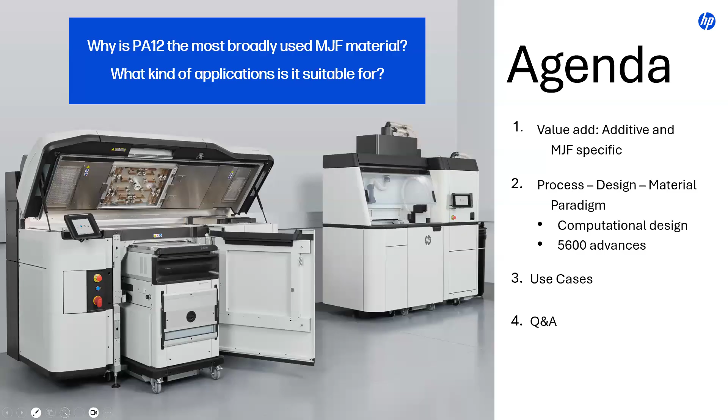So in comparison to traditional manufacturing methods on the left here, additive in general offers a lot of opportunities for customization, the ability to create new and complex designs, iterate really quickly, and use complex geometries, as well as giving a lot of production flexibility, right? You could be printing one part or 1,000 parts, and then you get a lot of cost and lead time savings often with an additive or an MJF process.

But then in the field of additive, if those are the type of advantages you're looking for, that customization, complex geometry, and high mix, where does MJF stand out in terms of additive? That would be in the isotropic part strength, so the ability to create really robust parts that are strong in all directions, the design freedom that it offers, as well as the ability to scale.

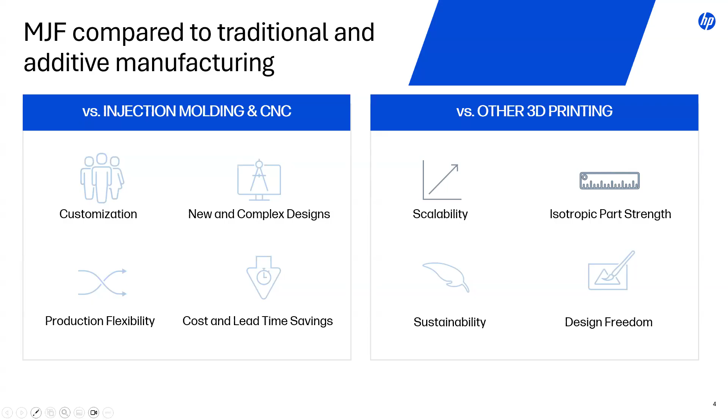And so when we look at PA12, this is kind of, like I said, the workhorse material for MJF. And why is that? So first we look at the physical properties of PA12. On the left here, we have the mechanical properties of PA12 on our 5600 series. You can see the strength and modulus are quite high, as well as a really good elongation.

For this material we have fairly good impact strength as well. We are not quite at injection molding properties, but we do approach the properties of injection molding. So you're able to produce really strong parts.

And you have all these additional benefits that come with PA12 on MJF. PA12 is very recyclable. We're generally using an 80-20 refresh rate, meaning 80% used material each time. That brings costs down, brings carbon footprint down, as well as having that high isotropy and dimensional control, repeatability of the parts. It's just very fast to print.

So all of these things come together and make PA12 our kind of catch-all material. If you're evaluating an application for additive, because you want things like complex geometry, high mix, or production flexibility, you would basically start with PA12. And if these properties are sufficient, that's where you would land, because it is a very balanced material. It balances the ability to print quickly and at low cost, with high repeatability, dimensional control, and high mechanical properties.

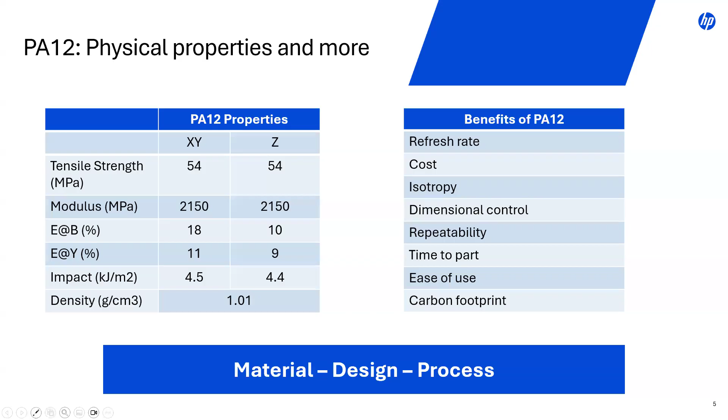One of the things I'm going to talk about today is computational design. This is a kind of design progression that we show. This is actually a part originally from an HP latex printer, so 2D printing - a machined aluminum part. If you talk about CNC machining, the thing that reduces cost is reducing the number of machining operations. That's going to allow you to have a high throughput of parts.

But then if you think about this 355-gram part, converting that to just the parts of it that you really need for plastic, that already has a cost reduction and a weight reduction. And then you can go further with complex geometry, like adding this internal truss or lattice structure.

This is the final iteration, where you use computational tools like topology optimization. Here you give a computer all of your design constraints, the loads something's going to bear, and it's going to generate, based on those load paths and constraints, a part that has the minimum amount of material required to fulfill those expectations.

And so this part, all the way through the design progression, represents a 50% cost reduction, 93% weight reduction, and 95 times lower carbon footprint than the original part. And it still fulfills those same

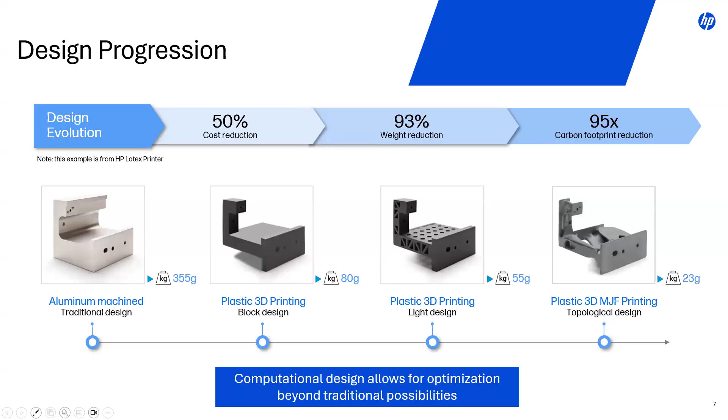I have another example of that here using computational design. This is the back post of an ankle foot orthotic medical device. You can see that computational tools were used here to model the stresses and basically create a more optimized design that's better for the patient, better optimized for that final application, and uses complex geometry.

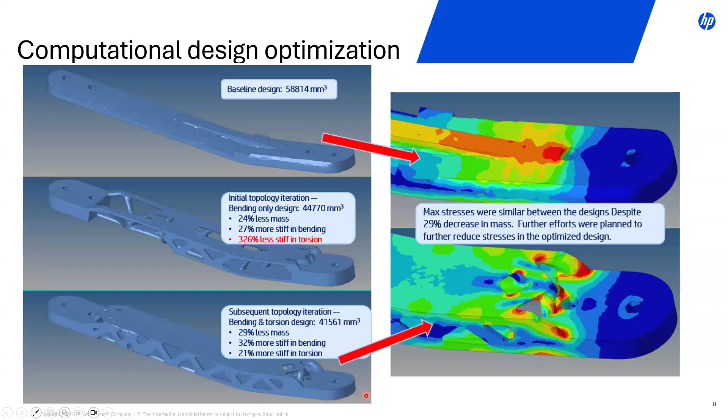to have a part that has less mass overall, but is still more stiff in bending and torsion, by taking advantage of those three dimensions. And then the MJF process and the strength of our materials is able to bridge that gap between creating the computational design, creating the CAD model for it, and bringing it into the real world in a way that is strong, reliable, and scalable to fully take advantage of complex geometries.

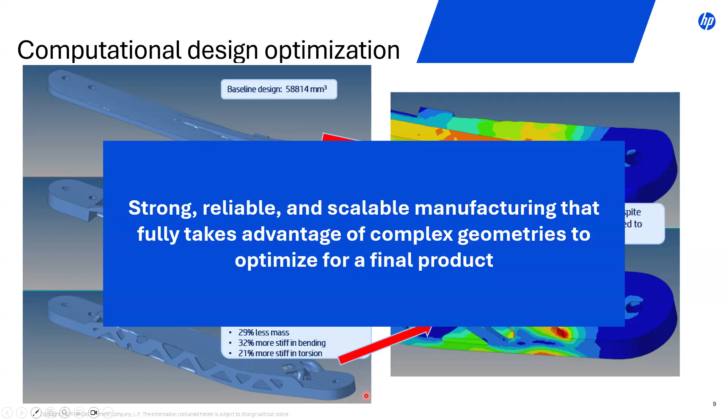So we can look also at PA12 across different industries. MJF is very prevalent in a number of these different industries, from automotive - a lot of interior automotive components - to drones. I'll focus there a little bit because I work a lot in the drone space. Robotics in terms of end-of-arm tools, and even humanoid robotics, or people have probably seen a lot of those robotic dogs.

Industrial applications, so we're talking about manufacturing and processing lines, as well as O&P and medical devices, or the medical space. Each of these takes advantage of different aspects of the MJF process and of PA12 itself.

For example, in automotive, it's very necessary to have Class A finishes, and this really takes advantage of all of the different post-processing that can be done, and a lot of the exploration that's been done on MJF PA12. In the drone space, we're very concerned with lightweighting. That lets you go further on the same battery life or carry higher payloads. Yeah, so some of these will take more advantage of certain aspects of PA12.

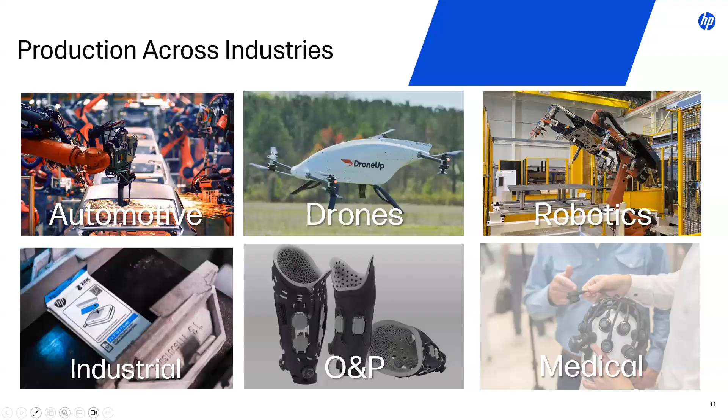So this is the Bushranger drone from the Eye Above project. This drone has over a 2-meter wingspan and is fully 3D printed. The entire body, the wings, the frame, tail is all printed with MJF.

It's very interesting talking to their CEO. They're creating this drone for wildlife conservation. It's an anti-poaching drone in South Africa, and it has very specific requirements because of that. It has to survive harsh environment, be field serviceable, really durable, and have all those segmented pieces fit together precisely. And of course, be very lightweight so it can travel long distances and stay in the air for a long time.

Robert Miller, the CEO of the Eye Above project, Telluraves, talked about how they had looked at existing drone solutions and nothing really held up to that environment. So they decided to create their own. They tried a lot of different types of technologies, and this was what they found to be the only thing that let them put this drone together and have it work in that environment.

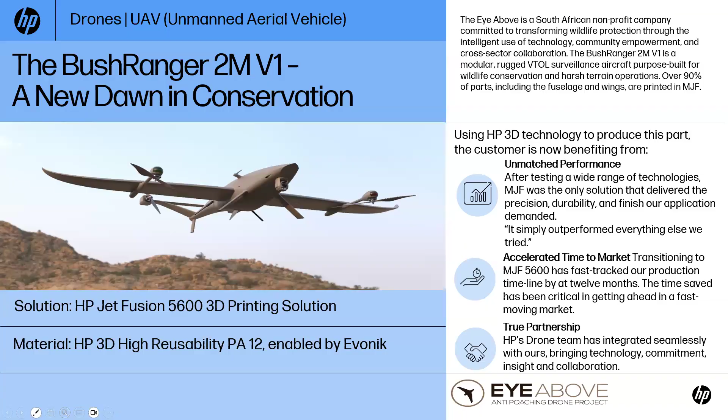So PA12, literally as part of the MJF process, you pull parts out of the build and we do a media blast. That's kind of almost like the sandblasting this is going to get in sub-Saharan Africa. We have to have the repeatability and consistency of these parts in order to fit those segments together.

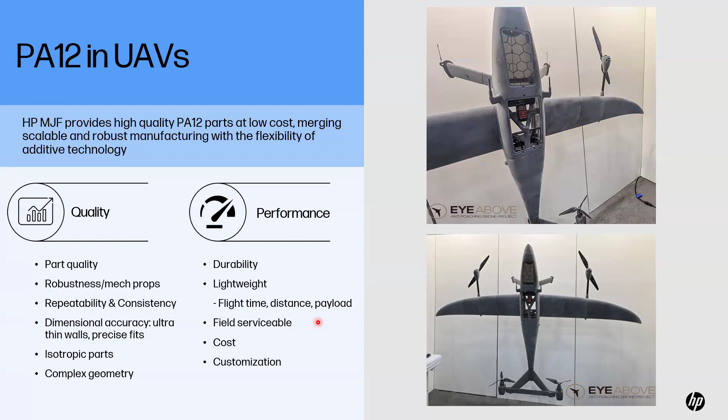Each of the qualities of PA12 here relate to the performance of the drone. And we see the same type of thing in the Blueflite Cobalt drone and Slate drones.

In this case as well, the weight optimization and the ability to have that high consistency and part quality from PA12 is really, really important for this production drone. And in the case of Blueflite, the ability to paint and do that surface coating is also very important.

When I first met this company at a trade show, even I was unaware that the outer panels of this drone were printed, because it was just painted so beautifully. I'm usually quite good at recognizing MJF in the field.

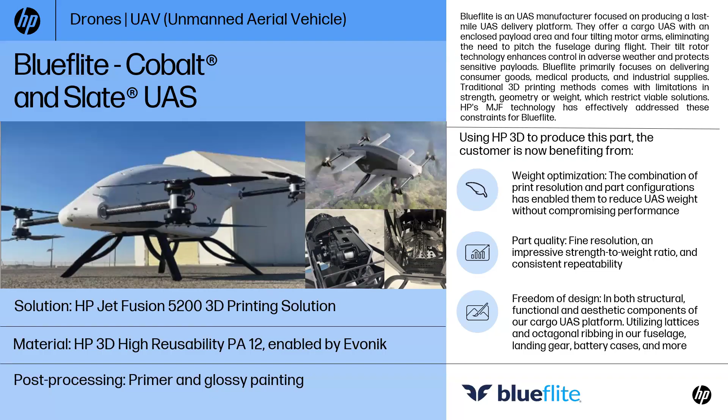Then we get into all kinds of robotics applications as well. Of course, I can't go into every one of these, but in robotics we have a lot of those same advantages, the ability to use complex geometries, make robust parts, and use kind of that lattice or truss geometry. In this case, it also becomes often important to be water and airtight.

For example, we have some pneumatic grippers where you can pull air through those channels, or some underwater applications, like end effectors that go on underwater drones. Those are specific to those type of applications.

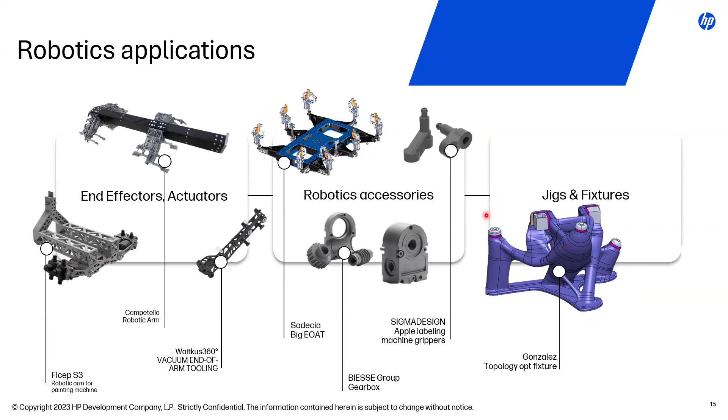This part actually has a 2.5 times higher factor of safety than the equivalent metal part, while still having something like an 80% weight reduction. That's because of how it's designed rather than assembled, with stress concentrating points where things are screwed together. So we'll take a bit of a deeper look at the Sodecia example here.

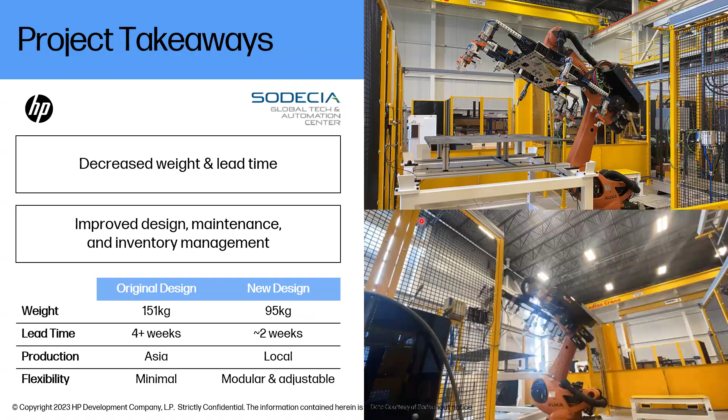That's this end of arm tool, just to show the scale of it. So this is a hybrid model where you have aluminum plates, sandwiched between that are these black MJF parts, for a robotic end of arm tool that moves car chassis.

By integrating the MJF parts with the metal, they're able to improve performance and also design in features that can be iterated and changed out, giving them better maintenance and better inventory management.

But PA12, the plastic, is holding up in these types of applications.

I also talked about medical devices. We have a number of different applications in the medical space, from custom covers that allow companies to produce parts even in small quantities as they grow, doing prototyping through production, all in the same material.

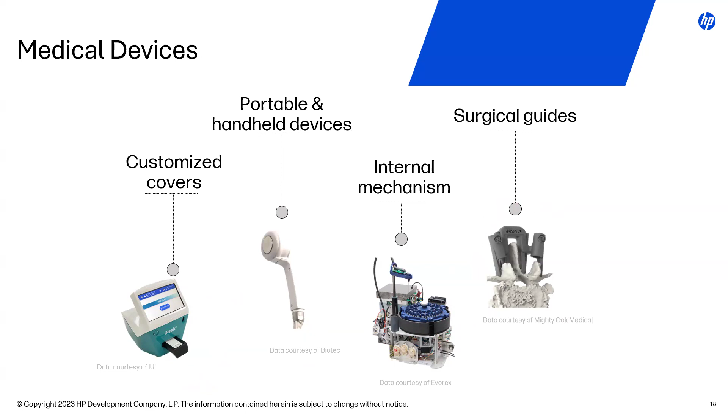That high strength allows it to be less bulky, more customized for the patient, and gives better patient outcomes, even for applications like a scoliosis brace or prosthetic arms.

Again, taking advantage of all the biocompatibility and customization of PA12. As a last example here in the prosthetic space, this is from Quorum Prosthetics.

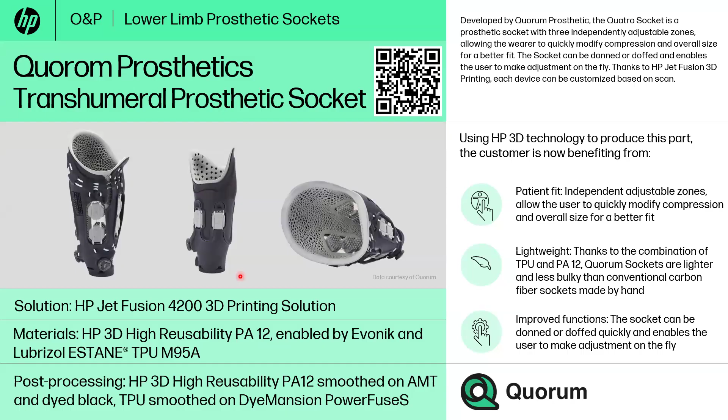And then lastly, in the machinery and equipment space. I couldn't get to all of even the segments that we're a part of today, like for example eyewear, but if you have questions about your segment, please reach out and we can discuss it and see if PA12 is a good fit for that.

But the really robust PA12 coming out of this process, our PA12 highly designed for our own process, means you just need something that holds up really well in the application, and you're able to create parts on demand and customize for the application.

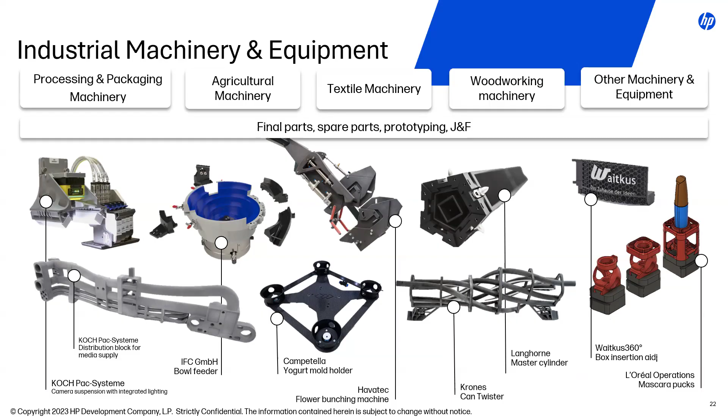Thank you, Dr. Leaven. I think it's worth stating too, the majority of applications you showed today, there was no additional post-processing, correct? They came out of the printer, printed on PA12. There might have been some dyeing and stuff, but the majority of it was just PA12 by itself, correct?

Yeah, so all the parts that you saw here that were gray parts, this is the standard finish out of the printer after the media blast. But there are quite a few of them that do have some type of dye process. It really just depends. We have a lot of information on different post-processing methods.

So anything from dyeing and vapor smoothing, which is not just cosmetic, it also has benefits when it comes to mechanical properties. You're reflowing the surface, so you eliminate crack propagation sites. You can get enhanced mechanical properties through vapor smoothing, seal the surface to water, and then do coatings like painting, Cerakote, even a UV coating or UV powder coat. So we've tried a lot of these different things.